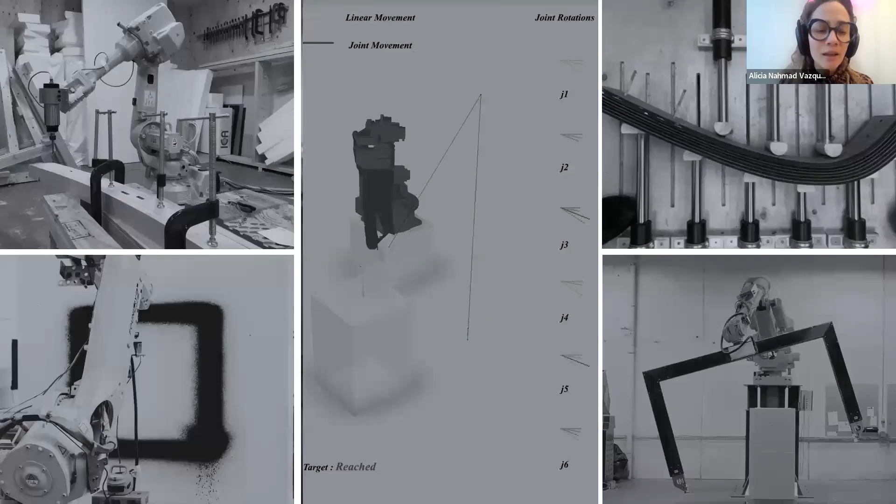I started working with robotics maybe around 12 years ago. And we have done many different things with robots, and a lot of different processes, as I'm sure a lot of people in Sina's lab also do a lot of very cool and different things with robots. So a big synergy there. We also design our own machines. Sometimes we build our own tools, like a pneumatic actuator. If the robot cannot do what we want, we design our own machines to do what we want.

And something that is very important is, of course, to think, if we are going to build with new technologies, how the buildings and the things that we build can look according to the new technologies that we have. That is very clear in the car industry, where we can see a big advance from how cars used to look before to how they look now that they are built with new technologies and advanced design systems and architectural geometry.

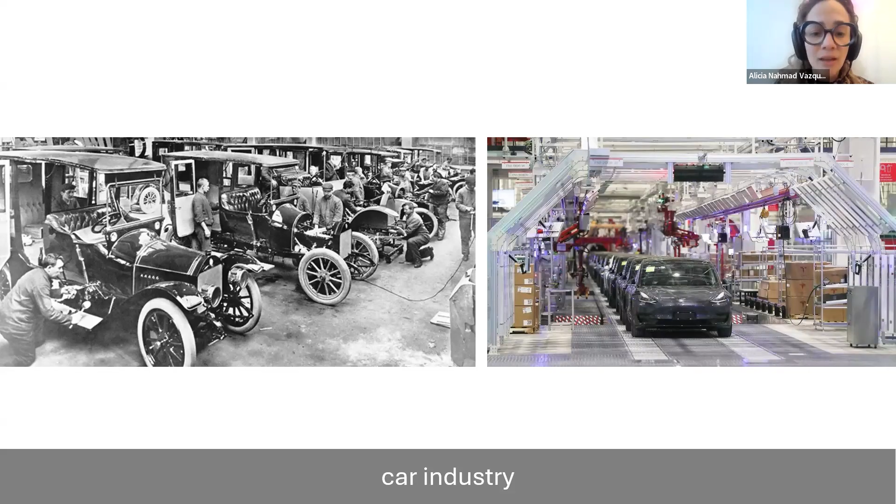However, and I think we all know this from the built environment, somehow our search for efficiency and for being faster and cheaper tends to go backwards. We see buildings from the past and we are amazed and really impressed by how they look, whereas our current buildings, and at least in Canada there is really an explosion of building right now, are they exciting us and are they bringing that sense of inspiration and awe that we used to have in the past?

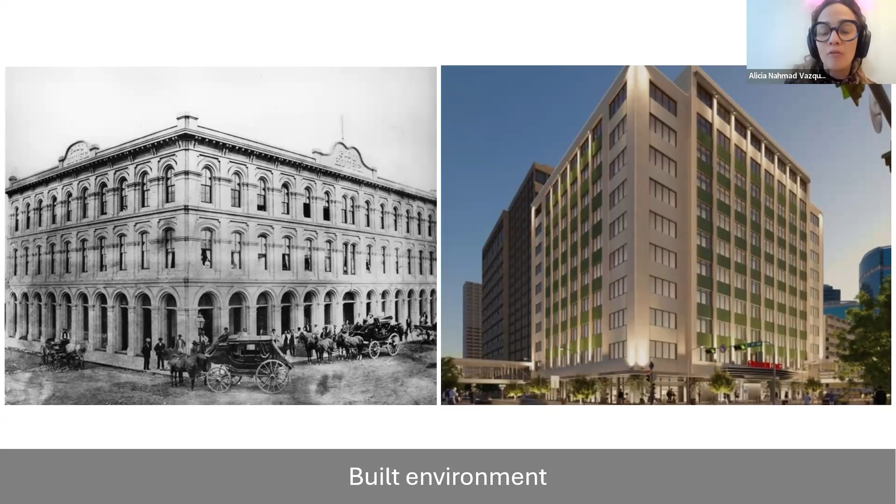And that is a critical point of where we are now. Something that is very interesting is also when we look at construction systems, like rebars or reinforced concrete, we see that these are patents that have been existing since 1866, the 1900s, and we still build in the same way. We still use all of these systems.

So how can we really make our work and our research with robotics and with new building techniques mean something, and why is the industry not moving in these directions? Maybe we hear a lot more now about timber and CLT, but if we look at the patent of CLT, it's also from 1920, so it's more than 106 years old by now. So it's also not the super new construction method that we are imagining. So how can we bring these tools to actually build in ways that are different?

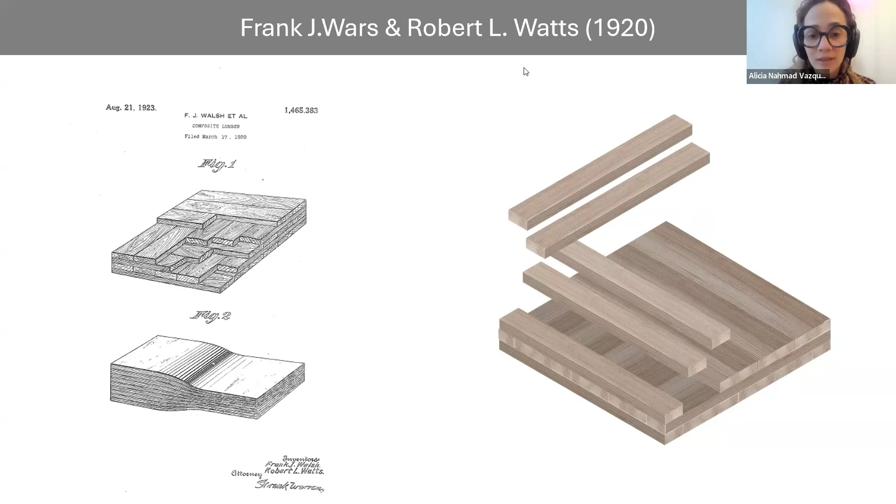Oops, sorry. And it's kind of interesting because in a lot of the presentations that I see, AI can give us really good ideas, and you see all of these presentations also from developers, and they end up with we can do all of these, and then at the end there is an AI image, right, which looks totally different to what they have shown you for the last 20 slides. Now we know that it can give us really good ideas, and it's a really fascinating era that we are in today, where a lot of people are starting to imagine really different futures and different realities for the built environment.

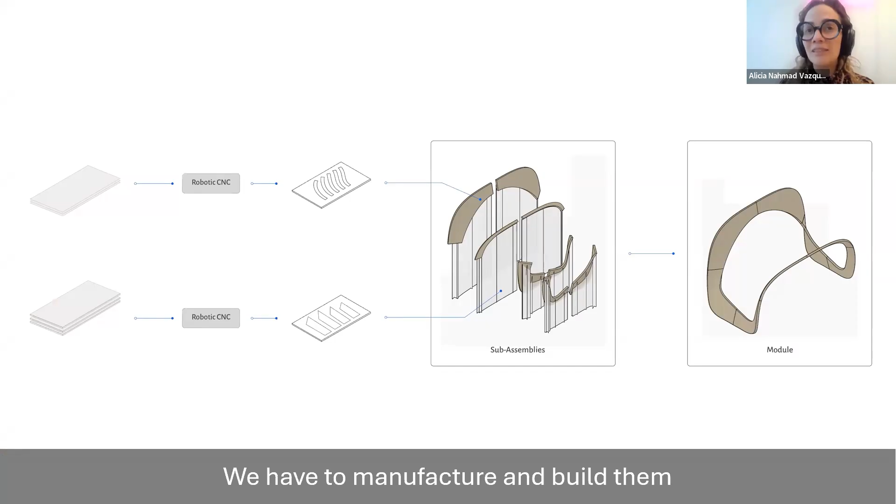And for me, it's always exciting when someone even shows us an image and I'm like, okay, more people are starting to think that we can build differently. But what we can actually do is, how do we build them? It's still very important to think, okay, we have all of these ideas. How can we manufacture them? How can we build them? And that's where our work has been situated for the last years: how do we build these things?

Of course, and thankfully, and this is not something super old but more recent, technology has really become more accessible. We can have access to a lot more, not only robotics, also a lot more computer vision tools, a lot more algorithms, a lot more machine learning right now, a lot of computing power. A lot of this is becoming so much more accessible that it is such an exciting era for where we are right now as architects.

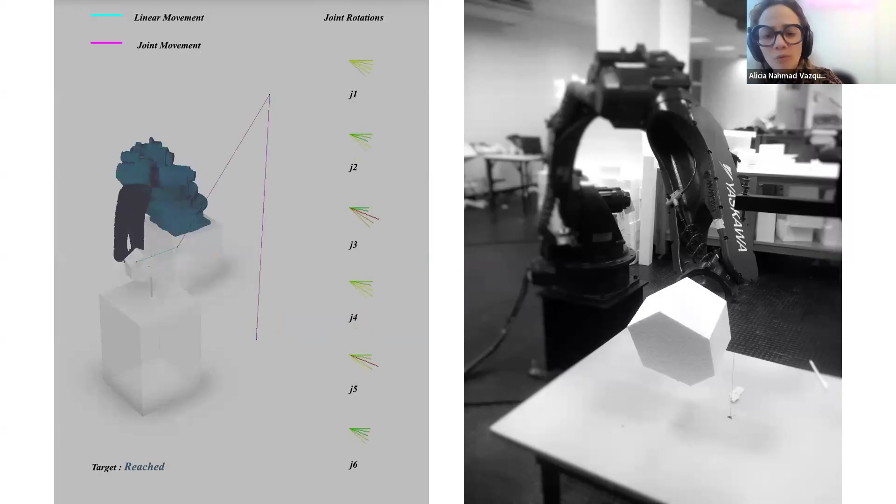And we also know that if we want to build differently, if we want to look at new construction realities, a lot of that is inspired by the past, right? So we have to look at old rules of building, ancient geometry, form finding, thin shells. All of these give us an idea of how we can now use techniques that became discontinued because they were too expensive, too difficult, or because the master builders disappeared. We can now redo them using robotics and digital fabrication. So a lot of this is coming from the past, to now learn how we can reinterpret some of these rules and build in a different way.

So we kind of have all the ingredients there. We have the rules from the past, architectural geometry as a field that has advanced so much. We have technology. So it's really about us as architects: how do we use them, how do we build, and how can we imagine other possibilities? How can we use all the advanced technological developments that we have for new build realities and for a built environment that excites us?

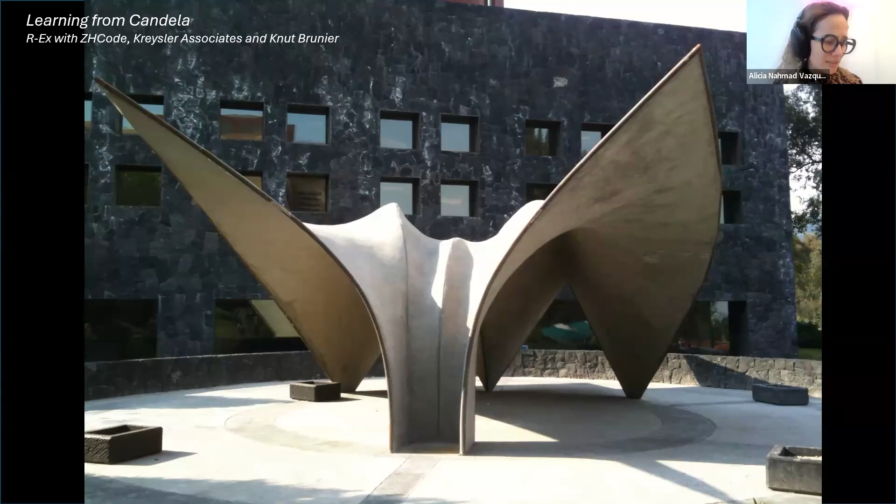So some of the first projects that we started doing was like this shell learning from Candela, which we built quite a few years ago now in Mexico. We only had a CNC at the time, we didn't have robotics or anything like that. We designed this shell. All of the arches are single curve, only one is double curve.

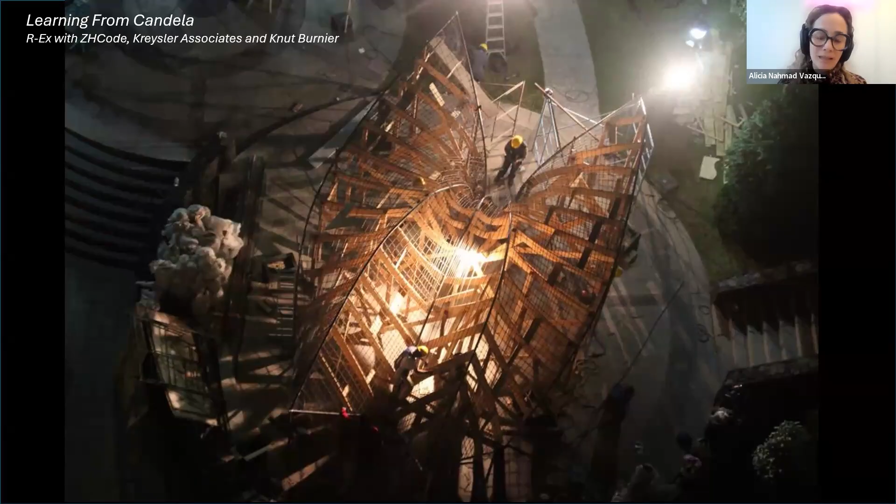Everything was done with craftsmen at the time, like masons, right? They were bending the beams on the edges. And the formwork was all done just with a CNC machine that we had on site, and we did this really sparse formwork, and then on top of that, the concrete builders rendered the concrete 6 centimeters thick on both sides of the shell, and then you can see the rebar.

Something very fascinating was to see the rebar distribution, how it really starts to match the design and the topology that we had in the poly modeling software, right? So it was really seeing how we model also can represent how we build. Then we also explored topology optimization. How can we reduce as much material as possible from a shell and still make it efficient?

So a few years later, we built this shell in collaboration with Kreysler Associates and ZHCode and Odico. We first designed the shell, removed as much material, and then built the formwork. In this case it was a bit more complex formwork, but still just using a CNC machine. And a lot of the workers would tell us, you know what, we don't really need any more than just a guide. We don't really need you to tell us how the shape is.

So it started to become really interesting for me to understand how we can merge these very skilled craft people with technology, because they only needed the formwork as a guideline, as a reference. Based on that, they could build this shell, which was rather complex, still standing more than 13 years later in Mexico City after quite a few earthquakes. So a really nice proof of concept.

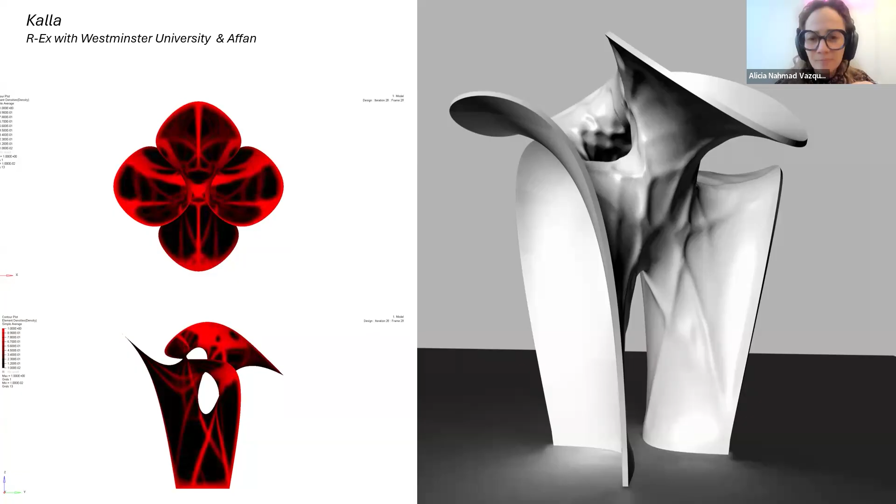Then we also explored more of topology optimization. How can we build this using different materials? So this is another shell that we built with Affan, a fiberglass manufacturer in Dubai, for the Seoul exhibition, trying to see how we can use digital fabrication and robotics to make the molds, to make it more efficient, to build shapes that maybe are slightly more complex.

And after this, in 2018, I was invited to collaborate with the Block Research Group and Zaha Hadid Architects Code to build Knit Candela, which was a very innovative shell in Mexico City, based on all the previous experience that we had of building shells. This was a really interesting experience into how we can bring the really advanced technology being developed at the time by the Block Research Group, a knitted formwork, which basically was going to be a stay-in-place.

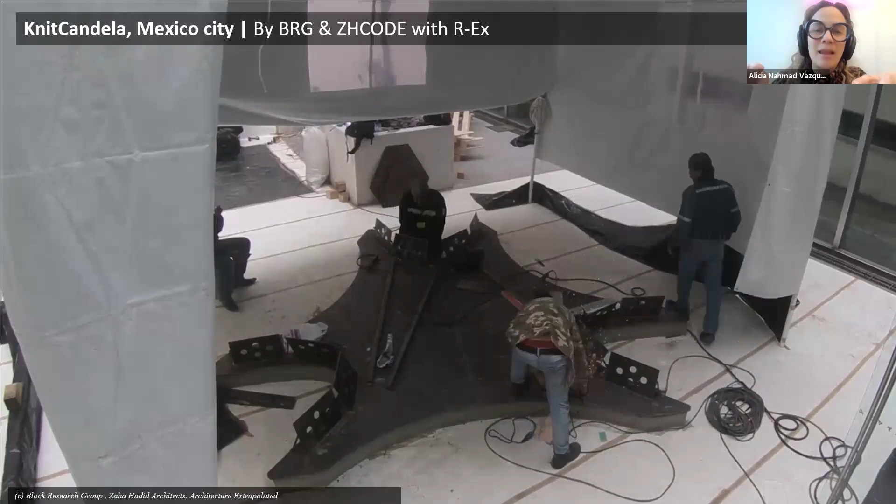So it was different from our previous formwork exercises, where we were already capable of reducing the formwork quite a bit, but we still had it there, into a stay-in-place knit. In this case, we had to work with a hierarchical utilization of technologies, where we knew that the knit required a very precise localization of the stretching points, just to make sure that it form-finds the correct shape.

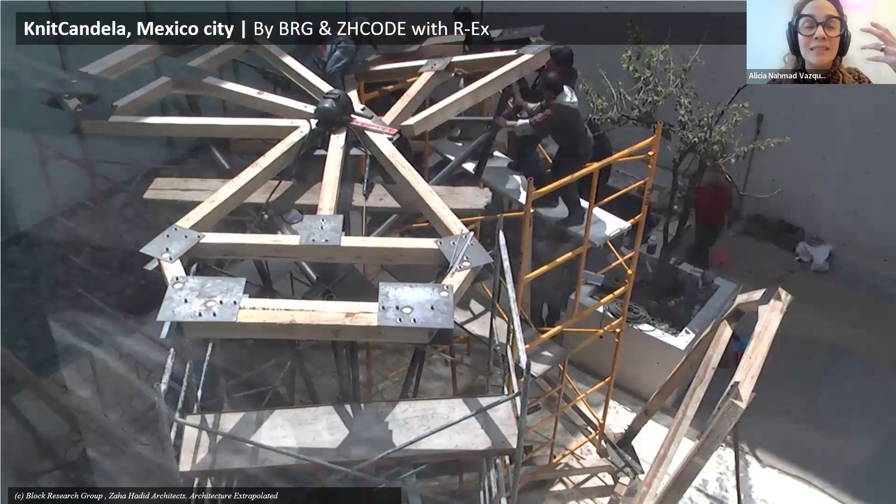But we didn't have access to really sophisticated machines. At this stage, we still only had the same CNC that we have had every time we go to Mexico.

So we really had to work through a lot of different iterations into how we can decide which parts of the geometry are done with the CNC to be super precise, and that will dictate and lead how the fabric gets extended, and which parts of the geometry we could have a little bit more tolerance for the workers to do manually.

So it was really a lot of discussions into not only the precision for the hierarchy, because we know that not everything needs to be done by robots or by digital, but how can we merge these two worlds together of digital fabrication and traditional construction.

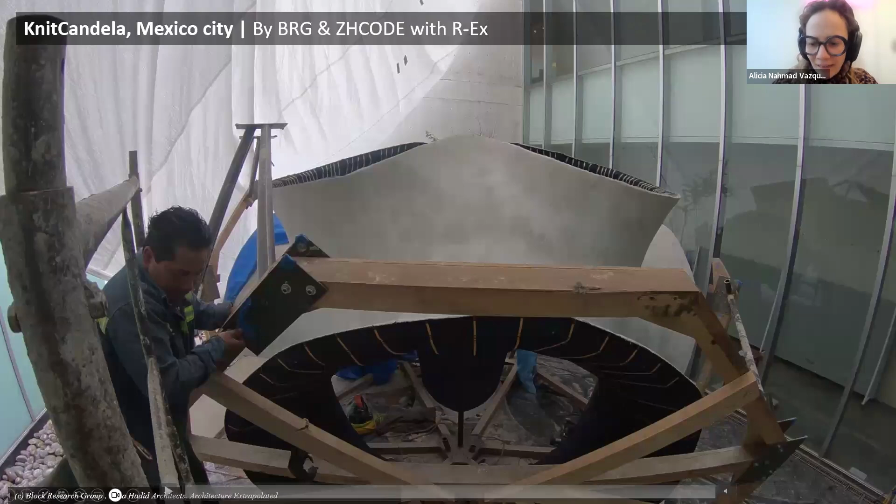And finally, we build the scaffolding. We build all of that big scaffolding that you can see out of timber 4x4s with laser CNC lumber inside to really mark the correct spots where all the hook rings will come, to then finally, when the fabric came from Switzerland, it got just assembled in place and stretched, right?

And we didn't really scan it to make 100% sure that it was the correct geometry, but it stood there for a long time. It didn't look terribly wrong. So it was a really exciting step for us after working through many different shells, when we really needed these high degrees of precision to understand how we can mediate between these. And at the end, the shell was rendered in concrete by the same workers that have already been working with me on all of the previous shells.

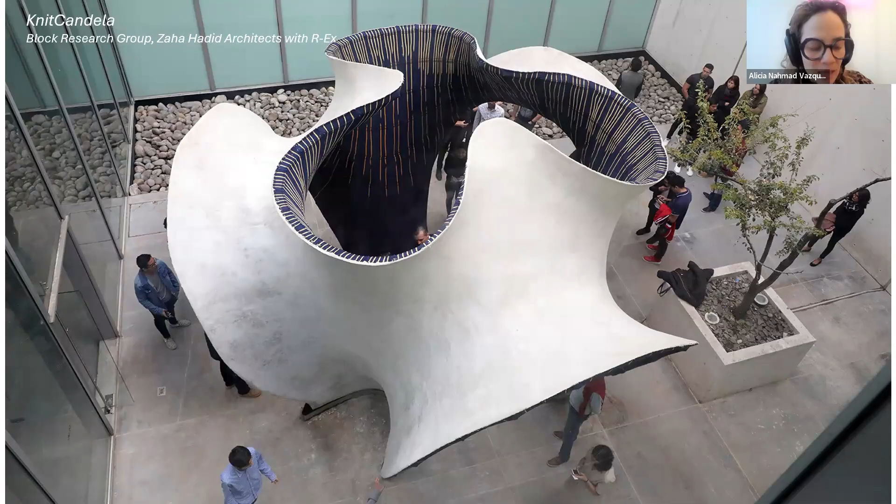And something really exciting happened when I called the workers to build Knit Candela. This was the third shell we were doing, right? And a lot of them were telling me that since they started doing the shells, they show this to any other contractor they go to work with, like, hey, I have built this, and that it can enable them to get other jobs, but also to see that pride in their job, right?

To create that pride in the workers of what they are doing is something that really makes us think, well, construction is a vertical, right? We need to integrate with the trades, with the designers, with contractors, with developers, with architects. So seeing that the fact that we are doing different geometries is benefiting everyone, and it's making them really excited, and everyone got paid all the time, overtime.

Everyone that worked overtime got paid, and the workers were working overtime, and they were really excited, telling us this is one of the most exciting projects they have worked on for a very long time. So it was a really fascinating experience.

And of course, it makes us think, how can we change how we design and how we build, and how can we incorporate architectural geometry and fabrication machines, and also enhance stakeholder participation, not only developers, designers, clients, architects, fabricators, but also the masons, the workers, everyone on the vertical of construction, enhance their participation through technology and through different ways of building.

And we have been looking a lot at robotics as that flexible machine that enables us to do hot wire cutting, 3D printing, milling, sand cutting, all kinds of different processes, right? So we know that we have a really small, compact, affordable, and powerful machine.

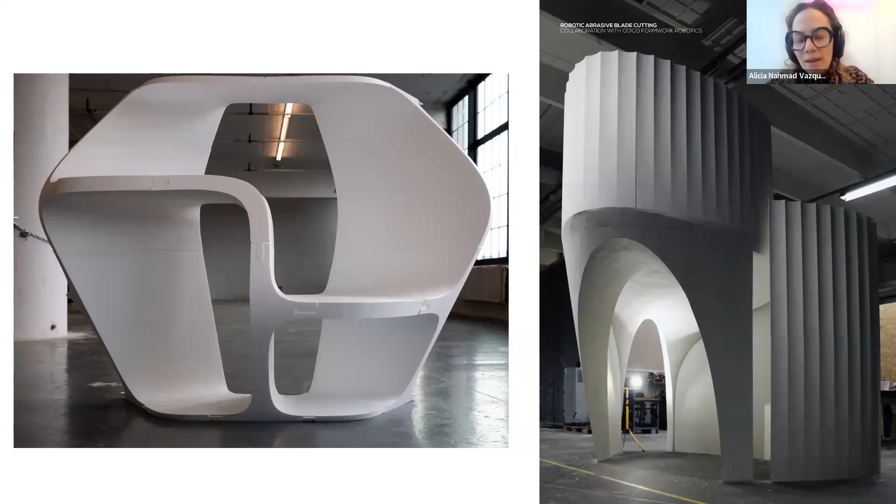And this is a project we developed at the AA, at the DRL, in collaboration with Odico, trying to look at how we can make these formworks. This was a mock-up for a one-bedroom flat with one of our teams at the DRL. How can we also use robotics to create patterning, to create spaces where maybe the ornamentation is part of the design, but also how can it mix with traditional ways of building? So not everything was robotically fabricated, but we have a very traditional stick frame construction that merges with these new ways of building.

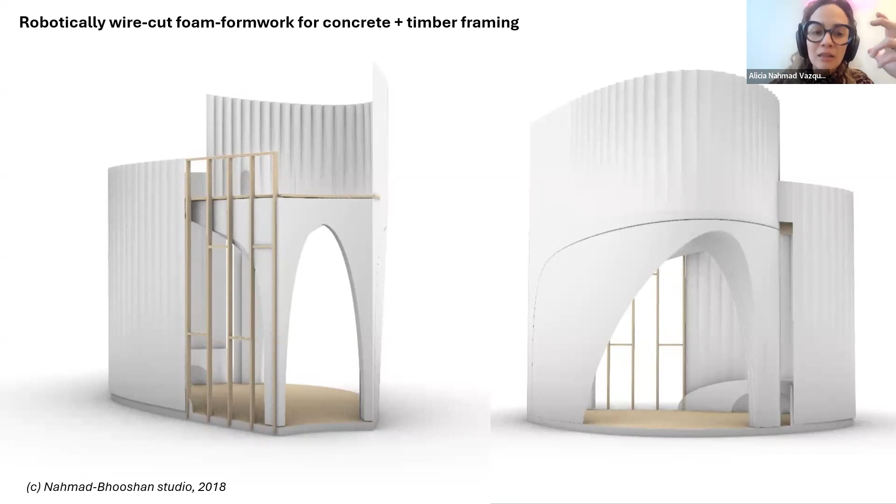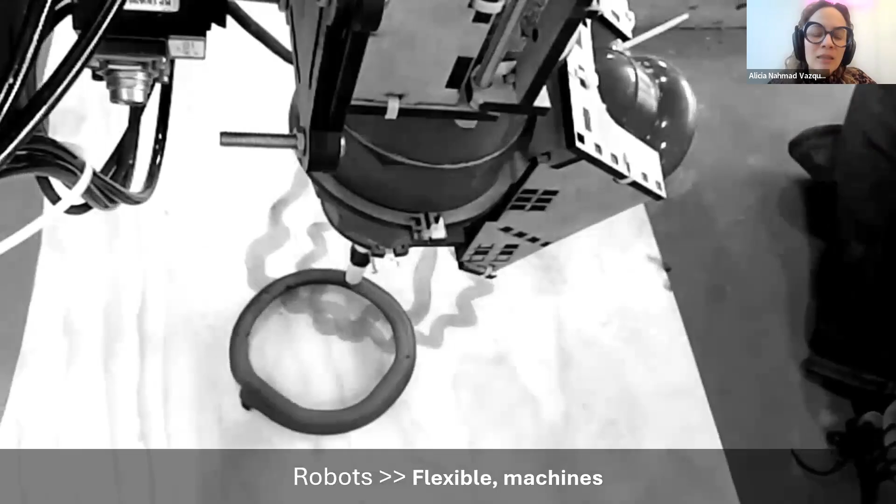And this was something that we proposed to the building minister in the UK, and they were really excited by the fact that we are merging these two worlds together, right? And this was some of the early experiments at the DRL into clay printing, developing our own extruders in collaboration with the Build Space at Autodesk. But the more important thing was not only 3D printing, but also what are the new built realities that this can bring to us, and the new spaces that it makes possible.

So we were always kind of trying to work in between these two worlds. And if we have a wall that is 3D printed, can it also enable infrastructure, like installations? How can it be different from just a normal wall that is normally a stick frame construction, right? With a wall, how can we really take advantage of all of these technologies towards new topologies and new tectonics that maybe were not possible before?

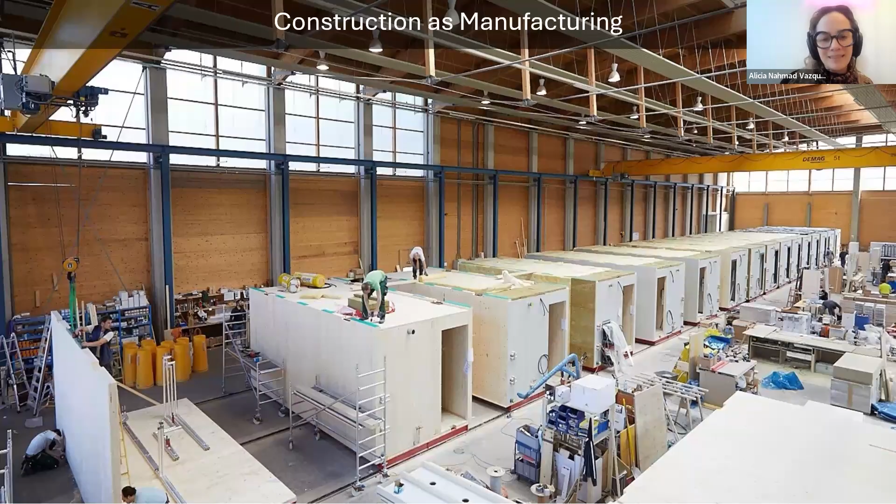And so we know that robotics and machines in architecture, or in construction, is not something new. We have had DFMA since the 1980s, design for manufacturing and assembly, but we do know that factory-made buildings have a lot of problems that we don't really see in buildings that are built on site. Although they are faster, efficient, and sometimes maybe cheaper, they rely on pretty much centralized supply chains. They require transport, and they don't always adapt to local economies because they don't need to, right? They are made in a factory offsite, really far away.

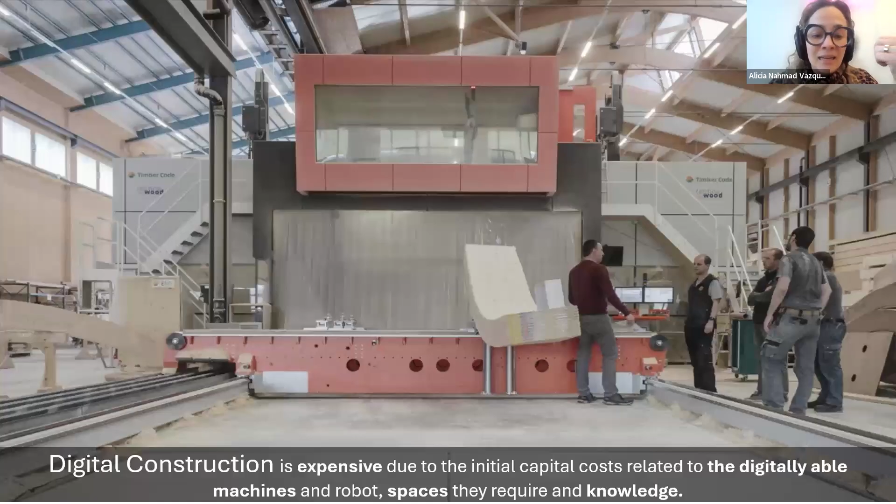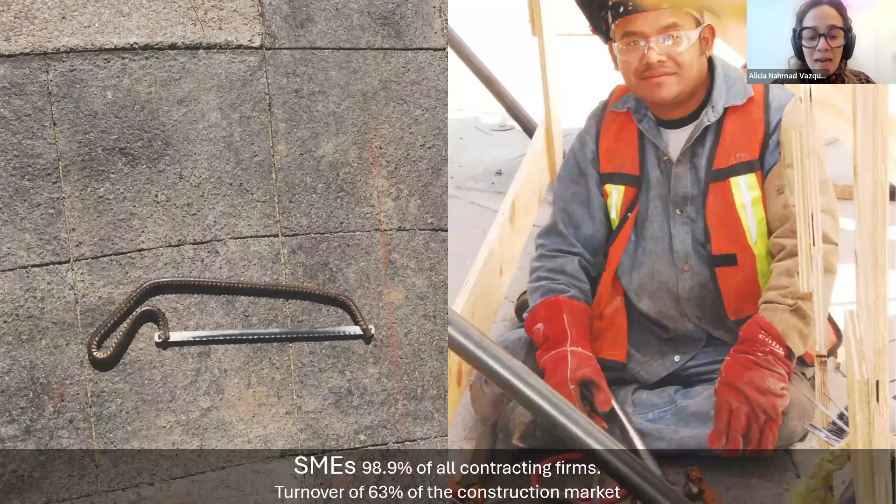So they don't connect a lot with local economies. They don't benefit the local economy, but also not with local idiosyncrasies, local ideas of what people like. It also tends to be expensive just because of the capital cost related to the machines, to the robots, to the knowledge. And so it lacks ornamentation. And we know that robotics can give us all of this ornamentation almost for free. We don't really need to put in any extras, but we are missing that integration with the local ways of thinking, local crafts, local skills, local supply chains. And in the world that we live in, small and medium companies are like 98% of the contracting firms, and also of developers.

We also see a lot more small and medium developers that are doing infill housing, small duplexes, quadruplexes, like 4 or 5 story buildings as a response to the housing crisis that we have around the world. We see that it's not only about the big developers that could maybe afford this, but it's more about small and medium companies that need new ways of thinking, new machinic ways, and new ways of building.

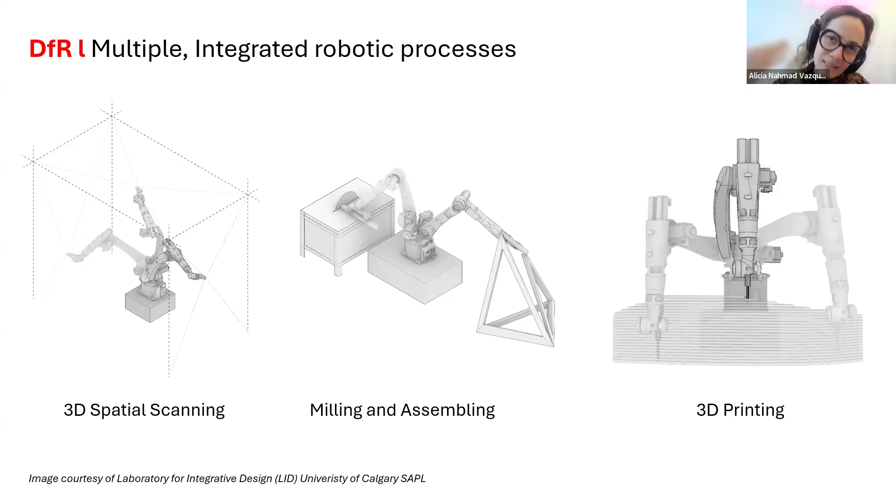So something that we have been thinking is, how can we move from this DFMA from the 80s into a paradigm of design for robofacturing, of using robotic cells that can robofacture high quality products and can be not exactly on site but near site, can integrate with local supply chains, local crafts, local economies, and this is where we have been working when we refer to small. And what we like about robotics is, of course, that we can do scanning, milling, assembling, 3D printing. So we have single machines, multiple processes. There are maybe some trade-offs in accuracies and efficiencies, but we do have a very, very simple way of doing it.

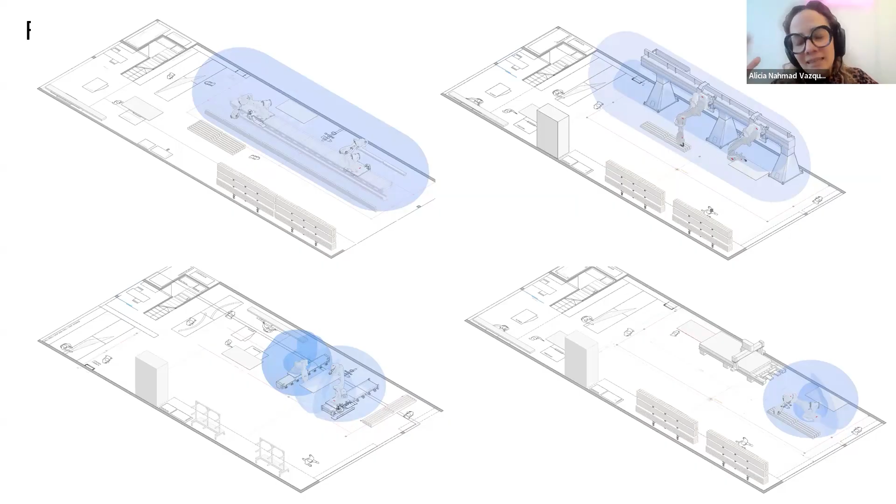When we talk about flexible robot cells, we don't talk exactly about a container. We're talking about maybe a 250 square meter facility, what we have been developing, where robots can have different configurations based on different production lines that are required by our different clients, and also by the different products that they are looking to produce. As I mentioned before, it's not only about the robots, it's about other machines, woodworking machines, metalworking machines, storage spaces. There's quite a lot more to that. And of course, really benefiting the local economy, not only by incorporating the on-site trades, but by buying local materials and using local supply chains. So that's the work we have been doing, this DFMA to DFR.

And that's the work I have been developing more closely, especially over the last 5 years, into architectural geometry and trying to democratize the digitization of the construction industry to a larger public, right? To be able to engage more people. And we have also been working on developing these participatory frameworks to engage more stakeholders. So as part of design for robofacturing, we are working on machine information, on developing cyber physical platforms, and that's part of the work we are doing here at the Laboratory for Integrative Design, into how we can keep these limited resources but introduce new vocabularies in this context of design for small robot cells for robofacturing. So one of the biggest changes is architects as system designers, a system designer that controls the process and controls the technology.

So this is a retrofit for a facade of a building that we were working on. In this case, the building already exists, and we kind of designed this. It's all catenary curves that are bent glulams with different apertures depending on the sun exposure, but

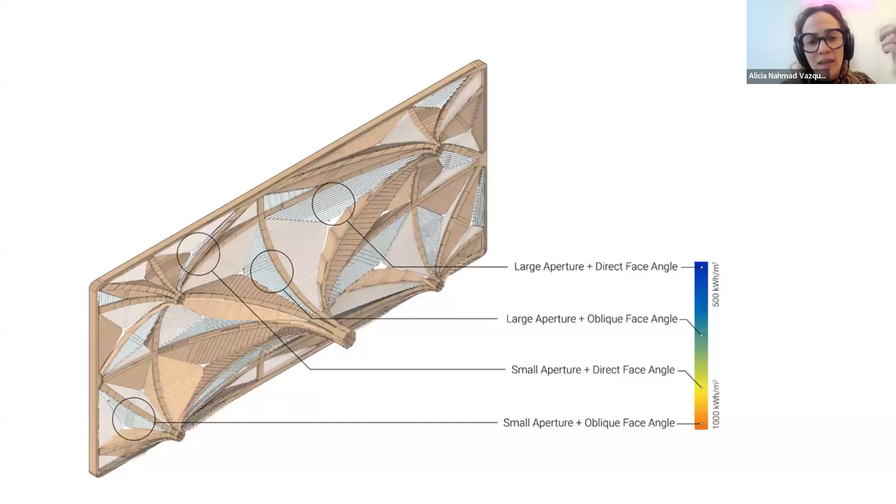not only from the outside, also from the inside: the view that the people want to have, the street view that they have, their relationship to the outside buildings, and the solar gains and energy gains. So in this case, we did all the studies, like you can see, from exterior solar gains, but also from the interior, different views and different transparency levels that the facade could have.

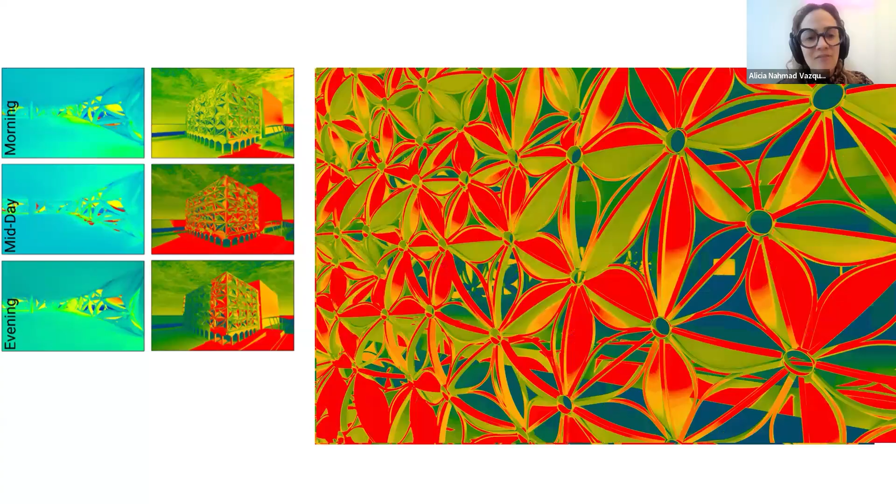And then there's the participatory framework, where we can have the people that are living or occupying the building, the occupants, being able to decide, in this case using a gaming engine, how they want this facade to be, more out, more in, but at the same time giving them feedback like, well, you have better views, but less sun exposure, or more radiation, or you are going to have more energy consumption.

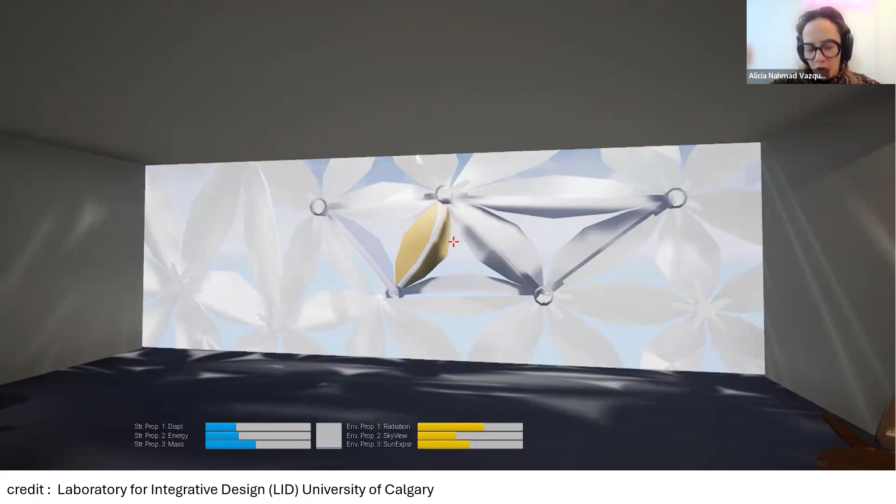So they could pick between transparent and opaque panels, and they could pick between pushing the facade further out or more in. And the idea is also that the final user, the same way that when you buy food at the supermarket and you can see the nutritional ingredients, right? You could also get an idea of, well, if I do these design changes, how is the energy consumption

changing? And we eventually want to integrate this to fabrication, so that we can say also, well, this will require more material, right? So that we can have a really clean, clear and transparent bill of materials and understanding of how these small decisions affect the whole downstream production cycle, not only the use and the occupancy, but maybe little changes on the geometry will require a lot more wood, right?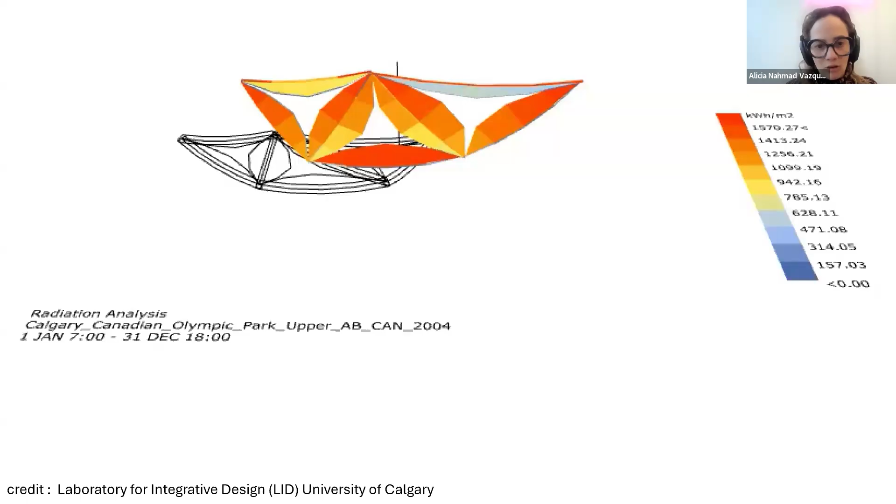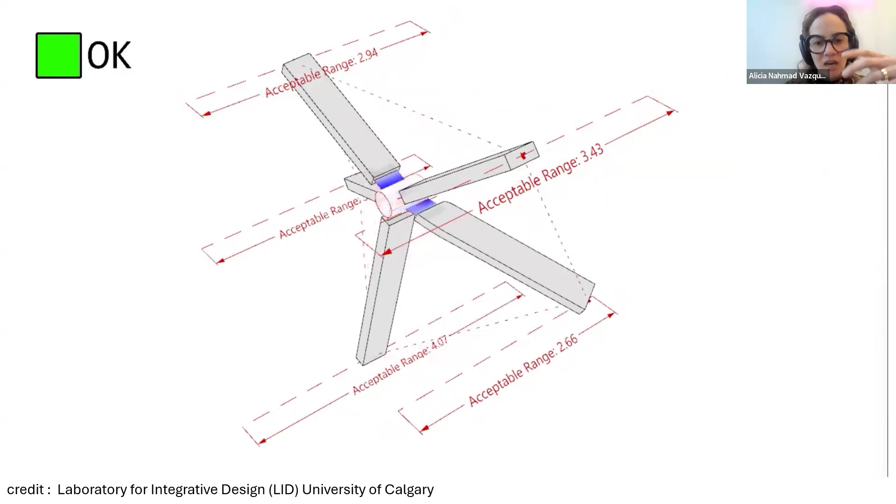Of course, on the back end of the platform, there is all the solar analysis of all these different configurations, and also on the back end it was constraining: okay, what is the acceptable range? How much can this move? When the geometry starts to be invalid for the robotic, for the catenary curves, for the bending of the glulam, all of this was calculated on the back end, not available to the user to see. But a lot of the smartness of the platform was at the back, right?

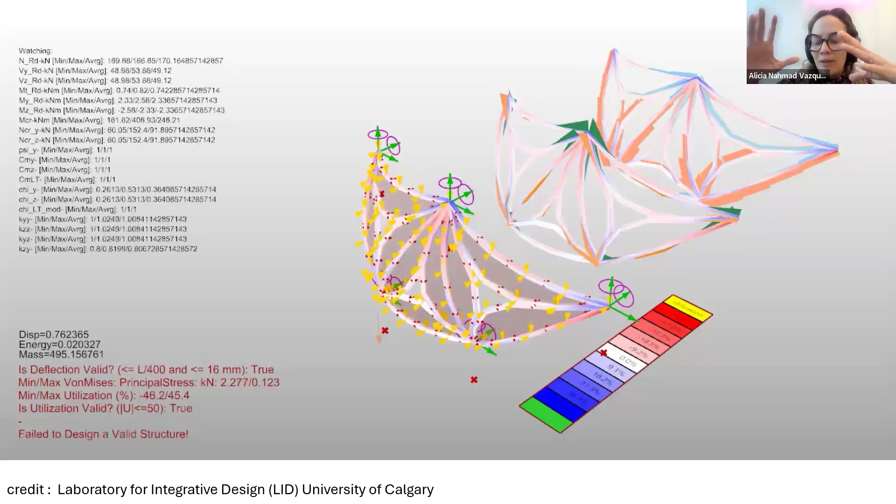And this was developed at the lab by one of my PhD students, Arman. And this was all of the structural analysis also, of how the different configurations that the user is picking, whether they are working or not, when they start to be one next to the other, right? It's not a single node, but multiple nodes.

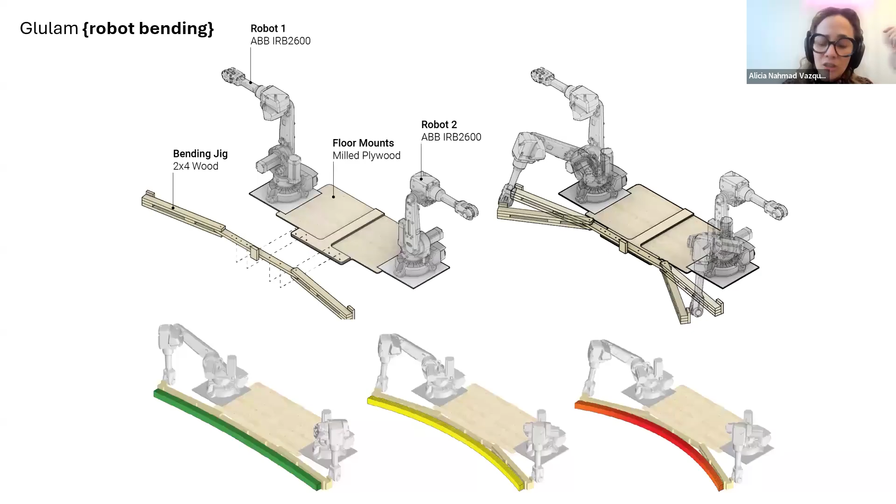In this case, the project was a collaboration with DIALOG Architects and also a local facade fabricator that was very engaged in making this facade with us. We did prototype quite a bit of these nodes. All of these are catenary curves, so the glulam laminations could just be glued together, then bent, and then, using the same robotic setup after bending, do all of the slot milling, all of the holes, all of the drilling for it to be assembled on site.

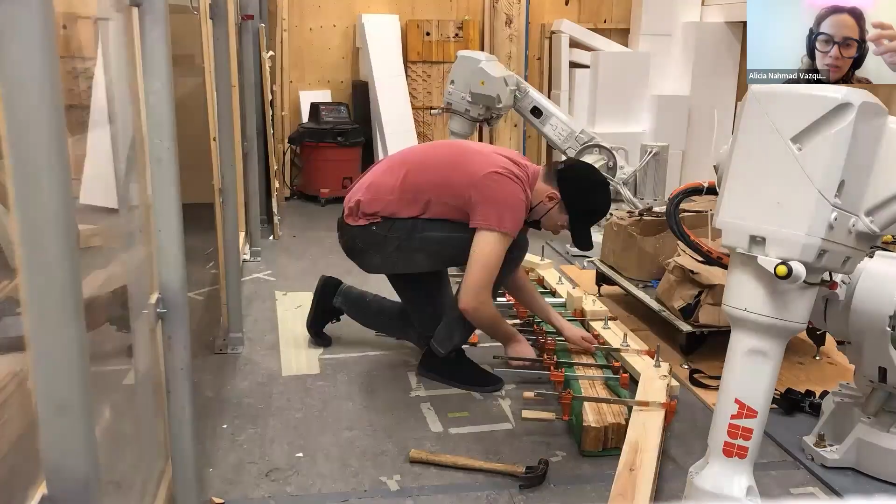So this geometry and fabrication feedback was put back into the platform to know which of these geometries are feasible and which ones are not. So integrating all of that knowledge back into the user, not only from a geometrical view, but from a fabrication standpoint, and trying to make this as transparent as possible all the time, right?

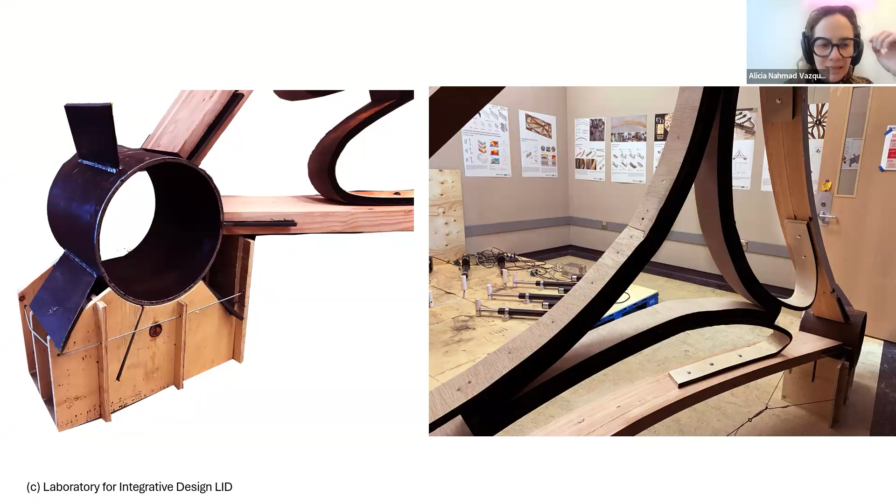So here we had the miters. We had all the slot milling, and then all the miter cuts on the ends with the circular blade, and also with the spindles. So again, same machine, multiple different processes. And well, this was the prototype. These are the steel nodes that were done by our facade partners, and then some of the prototypes of the facade that were finally fabricated.

But the more interesting thing was all the participatory design framework that was developed with our students. Another part of our work is towards these heterogeneous material understandings. Now that we know we have digital tools, we have computer vision, how can we look at material not only as timber or glulam, but how can we actually see what is inside that glulam, and how can we make it smarter and have more control over the material?

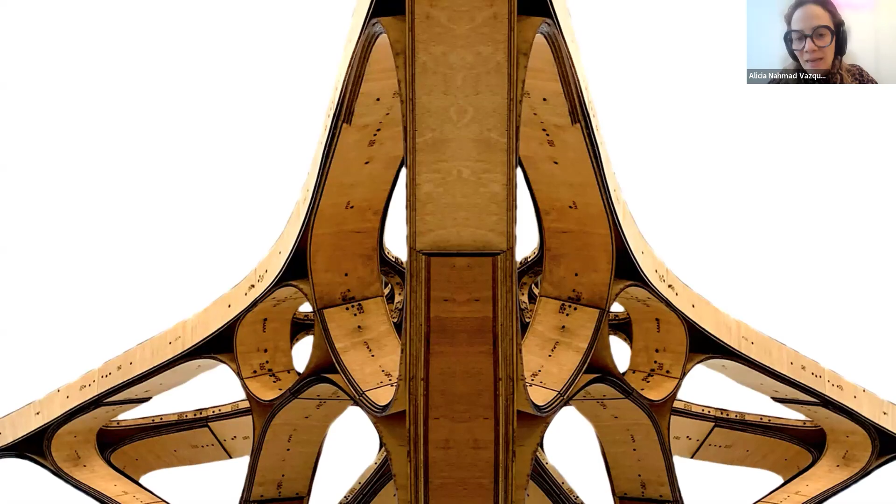So this is a project that we built here at the University of Calgary, also in collaboration with ZHA Code, looking at different glulam, bent glulam expression, right? In this case, the idea was that on the bottom there is a thicker lamination, right? You have maybe 8 to 12 lams. As you go up, you start to reduce 6, 5, 6, 4, 2, and then at the end you have only a single lamination, right? So making this glulam very expressive in the structure, and not only something that you kind of buy.

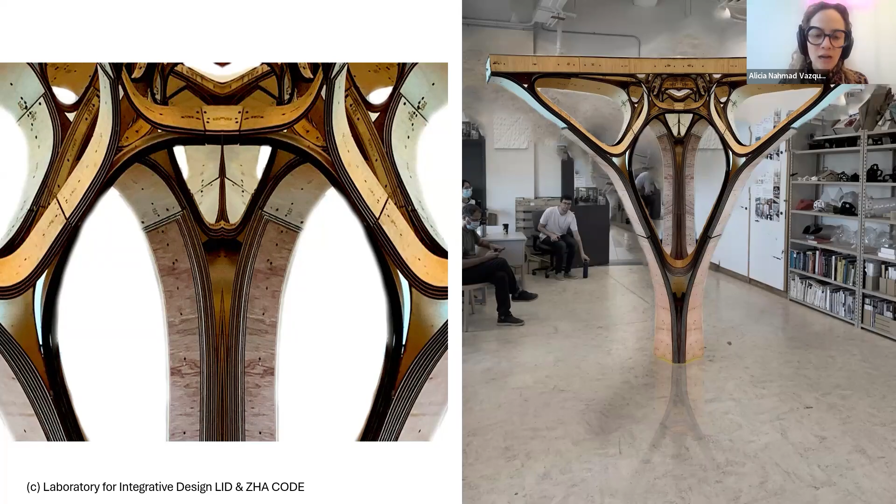In this case, we had to develop our own machine, which is all linear actuators that have a speed. So based on the speed, you can control how far they go. The speed and the distance give you control over the actuator. And then we had the different curves. In this case, these are not catenary curves. There is a lot of different curvature. So we had to work with our own machine and really try to explore that hierarchy from the bottom to the top on the bending, on the curvature and on the material affordances.

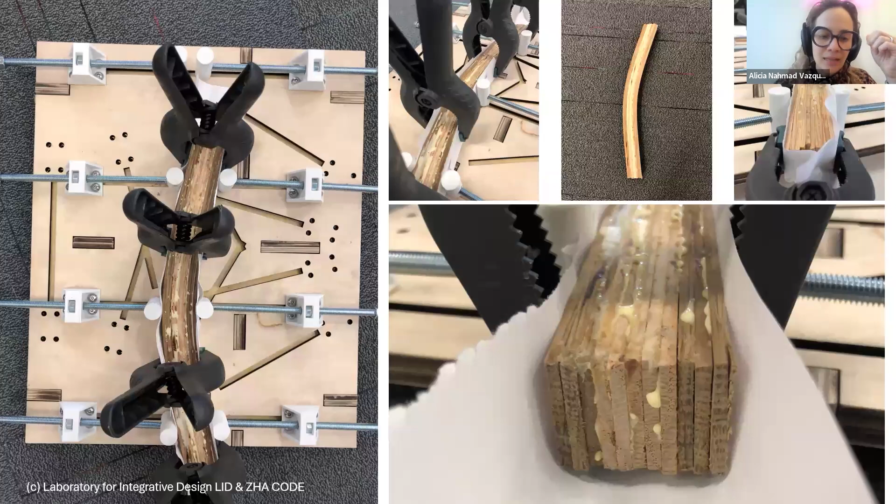And so we also started to explore at the same time what happens if we start to mix different woods. So for example, we have walnut or a harder wood on the outside, which will be more resistant to the weather and a lot stronger. But then on the inside, we have softer woods that will make the lamination at the end of the day lighter weight and not as heavy.

And this is something that we also explored a lot in my studio in the M.Arch at the Weitzman School of Design, these hybrid laminations. One of the teams did laminations with pine, Douglas fir, oak, changing the lamination, and asked what implications this eventually could have not only for the aesthetics but also for the performance. In this case, this is walnut, again with pine, and again with Douglas fir, trying to see how we can use the more expensive, harder woods where we need that resistance, and also our interior laminations.

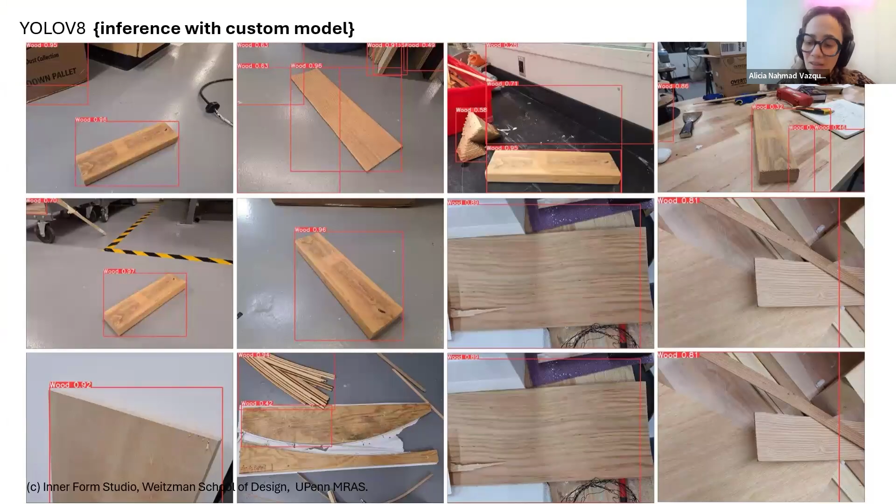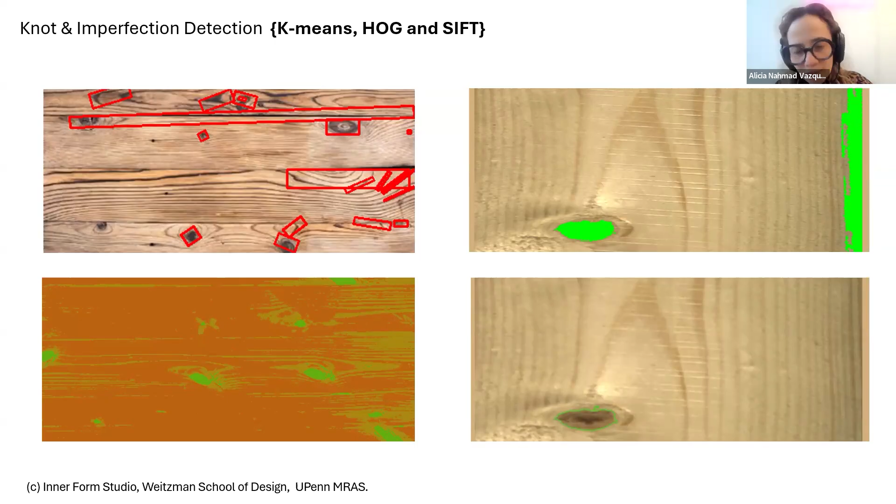And we are also looking at machine learning as a way of understanding materials, right? So not only identifying wood, but also what the wood imperfections are, where the knots are, what the direction of the grain is, and how this can help us have more efficient workflows towards milling or positioning our wood on the machine, so that we are not only using the wood most efficiently, but can also control the speed of the spindle, especially when milling curvature, as you go from across the grain to along the direction of the grain. How can you actually work with that? This is a lot of the research that we have been doing.

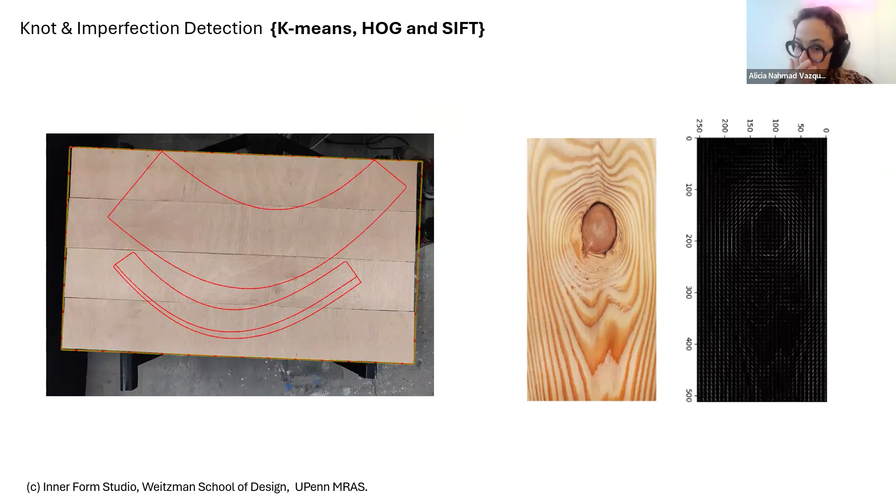However, it's very easy to move aluminum sheets around. They are flat. When they are folded, they use a lot of space. The volume is really high. So can we just bring the robot inside the container on site, score all of these, and then bend them in place and have the benches? So this is some of the furniture, just at a small scale, that we are doing with that

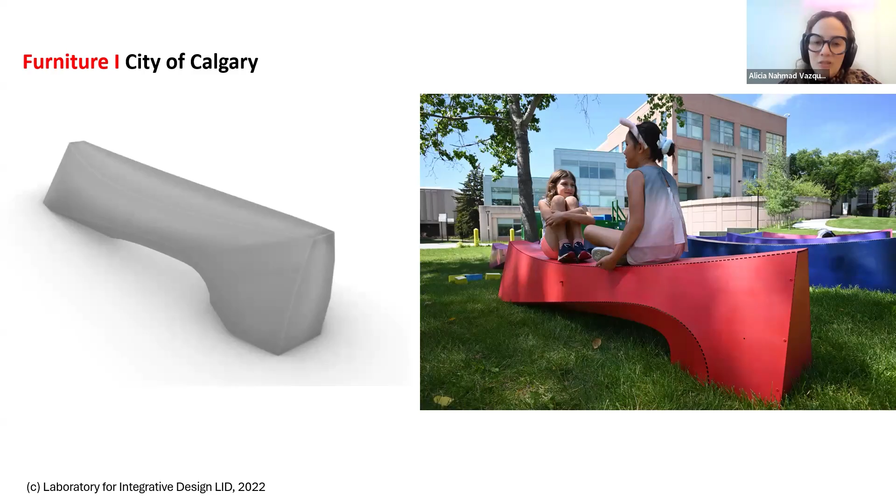So in this case, we had sand batteries inside, and we had a thermostat. So in the winter, when you sit on the bench, it will warm up and you will feel a bit warmer. And so this is some of the research that we are looking at, always trying to think what is exciting about these materials and these machines, and how can we make it different, or more efficient? Maybe not always just making it simpler, but also making use of the concrete in ways that could do more than just being a bench, right?

So we really use how we can leverage technology to create this sophisticated, dynamic, and customizable process. And more important, imagining a different way of building, a different way of relating to the trades, a different way of how our buildings look.

And this is a phrase I read a couple of years ago, but I really like it, from Francis Kéré: the more local materials you use, the better you can promote the local economy and build local knowledge, which makes people proud. And this is so true and so related to our experience, and it's really motivational to us. So maybe 5 years ago, we started the Circular Factory, which is a startup.

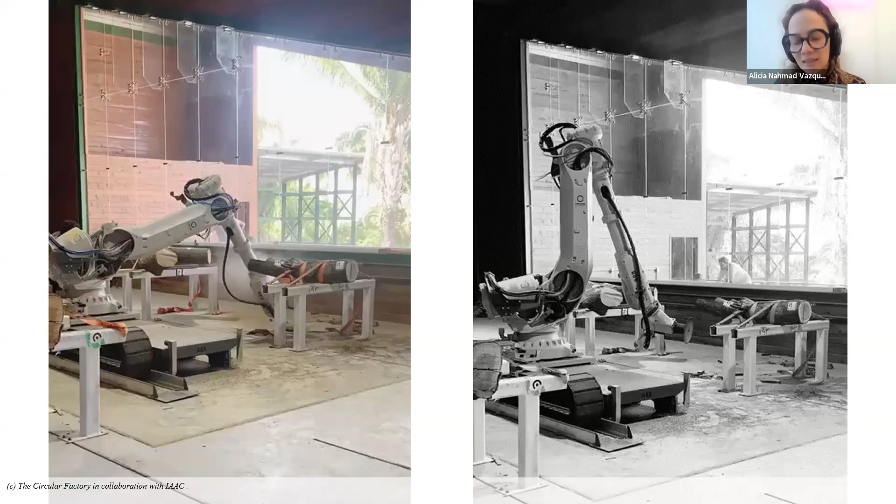It's a small micro factory, maybe 400 square meters with robots, and we have been exploring a lot of different ways of building. We have mainly been using local timber. This case was the most extreme. This is a project we did in collaboration with IAAC.

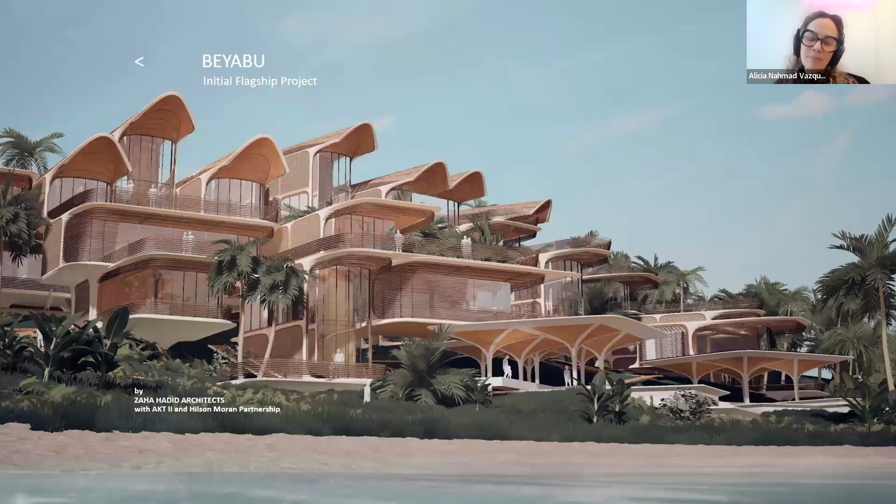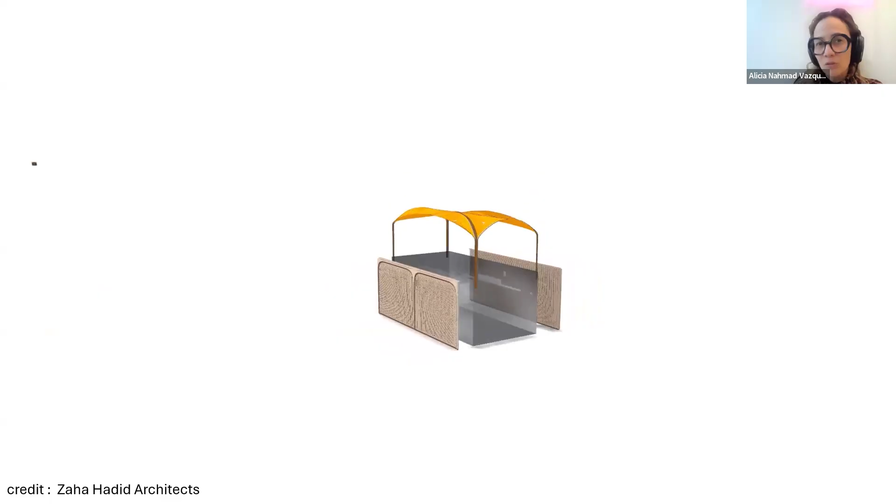And this is a collaboration again with ZHA Code, and they were going to build this project, and how can we build it with local resources and not import everything from abroad, right? The idea was the same as I mentioned before: how can we engage with the local material suppliers and the local economy? So with this idea, we started to design the microfactory. Of course, this being a Hadid project, it had all the complexities of a configurator. So it really had a lot.

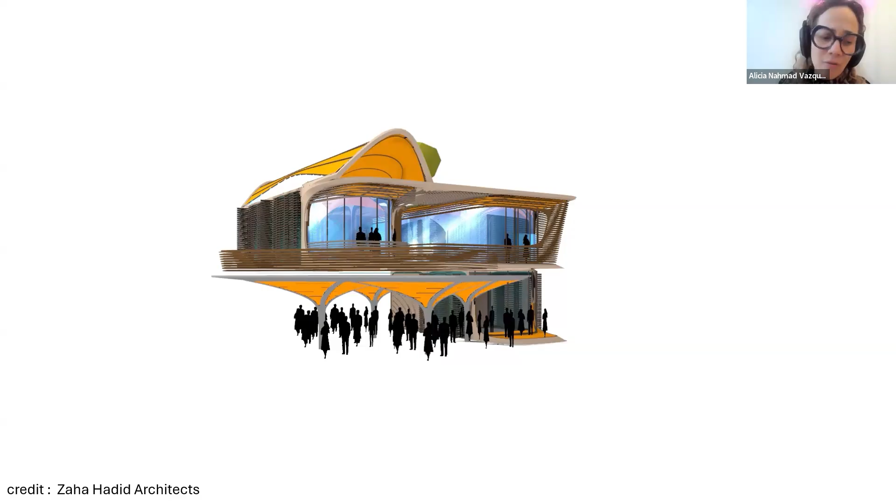It was giving the users a lot of different options, like they could pick their windows, balconies, and we had to design a factory or a production line that could have the flexibility, because we don't know what the users will pick, right? So the flexibility to produce all of these different components in an efficient way. This was a really exciting collaboration. All the configurator was done by ZHA, and they had this very large kit of parts.

And so some of the first steps we really had to think about is, how can we work with these certified forests, or really try to look at raw materials locally, what is locally available.

We were not sure what was locally available, and then try to create this local microfactory that could integrate all of our experience, the digital information, and the local knowledge of timber, which was not a lot, and also create these components and this kit of parts for these modules.

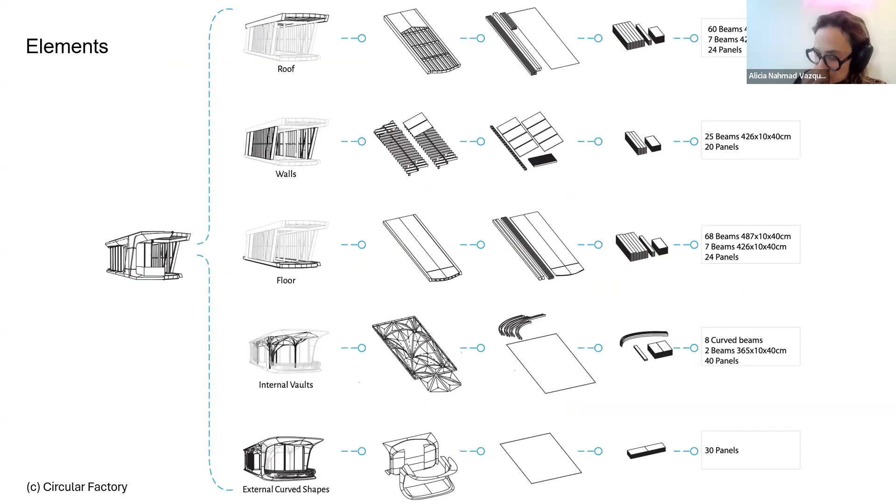So one of the first things we had to do was really a hierarchical analysis, again, like in Candela, a hierarchical analysis of the pieces, right? Like what requires more curvature, what are the more sophisticated parts that actually need digital fabrication, what are the parts that could be maybe done more traditionally, and how we can split these to really have an efficient factory. Of course, we designed all of those panels with their corresponding fabrication process, like planer, jointer, robotic CNC. As I mentioned, it's not only about robots; it's about the full production.

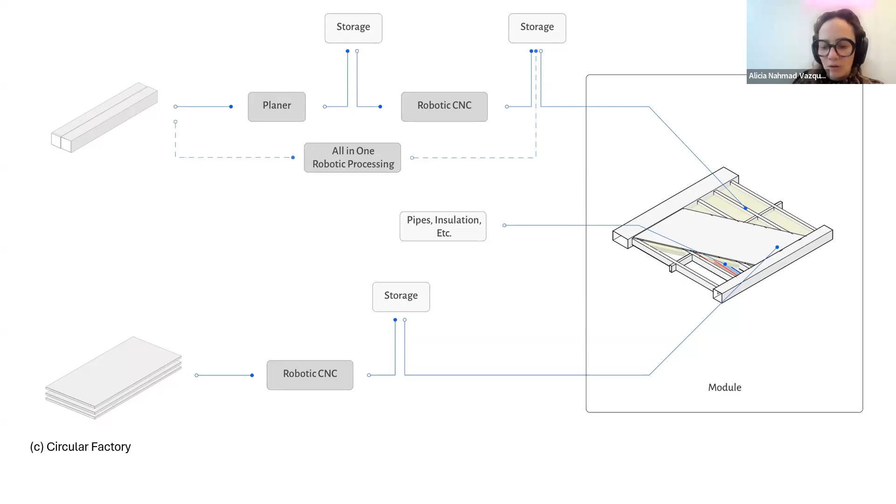And inside each panel, you had all the pipes, the insulation, everything that you really need in a construction project, right? And then we had all of those curved modules. What do they need? And how can we make them? They ended up being made with the robots, not in this way. So we worked on rationalizing and doing the DFMA for that complex design.

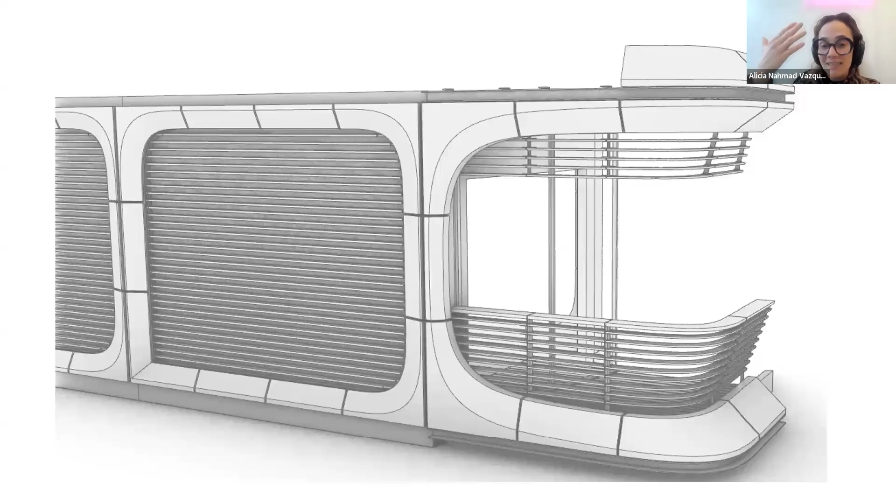Something also interesting that we had to take into consideration was the fact that there are no cranes. So, for example, we had to see, okay, what is the biggest machine that you have? Well, it's a telehandler. It can only carry 2 tons. So we have to make each component, regardless of what the robot can do, not heavier than what the machines can carry, right? So really trying to localize everything from production materials to the local machines and the local existing facilities. So you can see that all the panelization is made in small panels that can be carried.

We looked at the lamination, how different lamination techniques, really going back to that research of the grain directions, merging different lumbers, can give a different effect at the end, and actually a different aesthetics that we can control, so we can control the direction of our laminations.

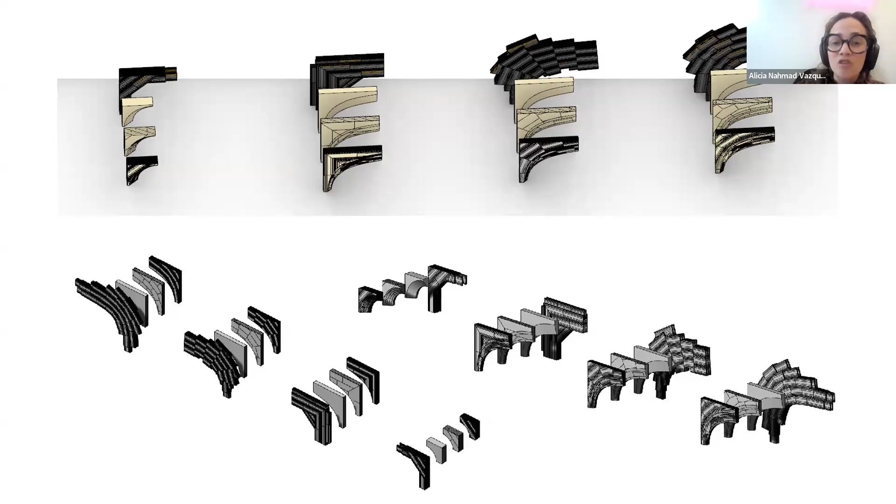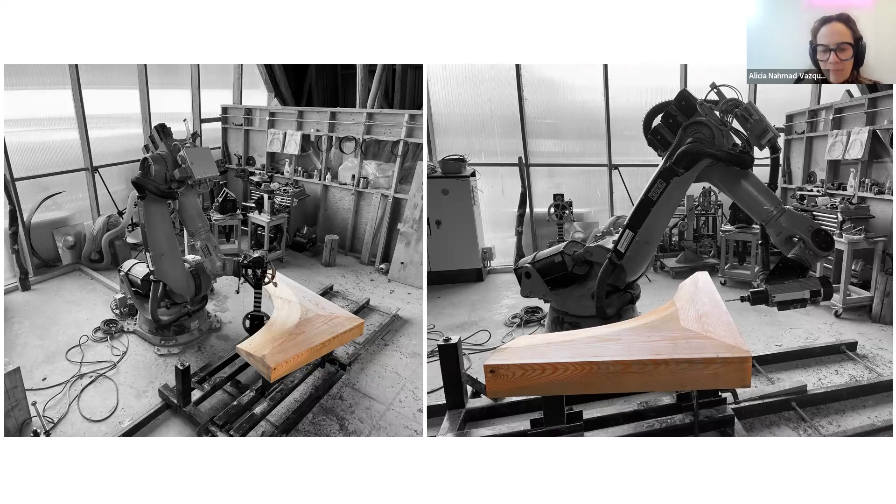And we built this first prototype at Hooke Park in Dorset, just testing some of the ideas. This is Hooke Park, right? The bandsawing, the milling, the prototype. Based on that, we thought, okay, this makes sense. We can really dive into this and start to do that microfactory adapted to the local means.

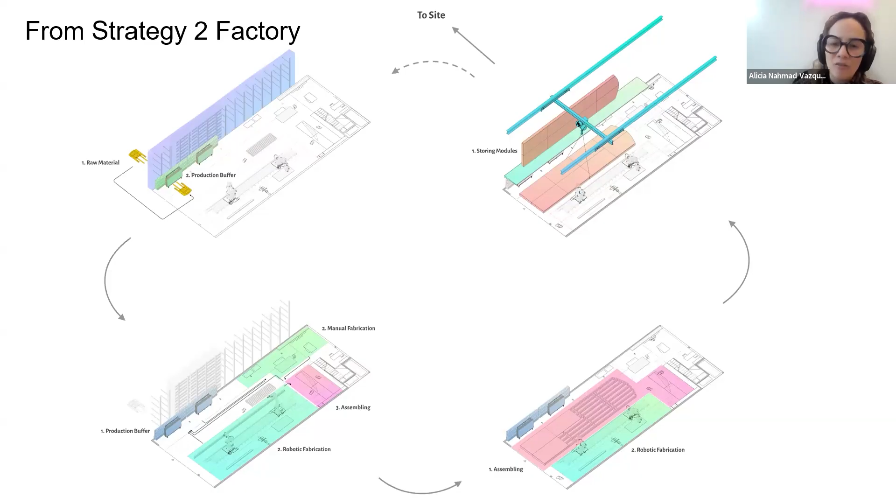So the design was really trying to keep the footprint as compact as possible, but having all the machines needed, all the storage, and all the different utilities. As you can see, material comes in, gets processed, you have a crane, you have storage, it's assembled, then it gets out, really trying to minimize the financial investment while maximizing the flexibility and the ability of making different things. We also have a lot of computer vision to understand how to adapt to local materials that might not be precise, might not be totally correct, right?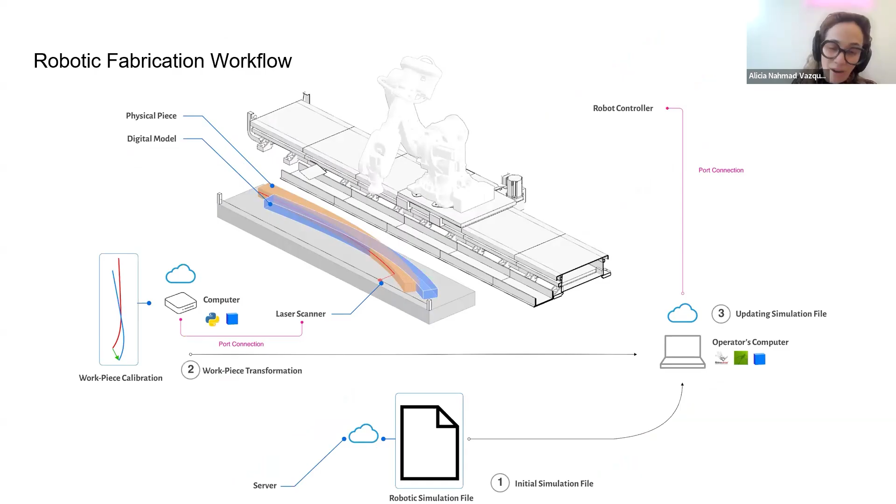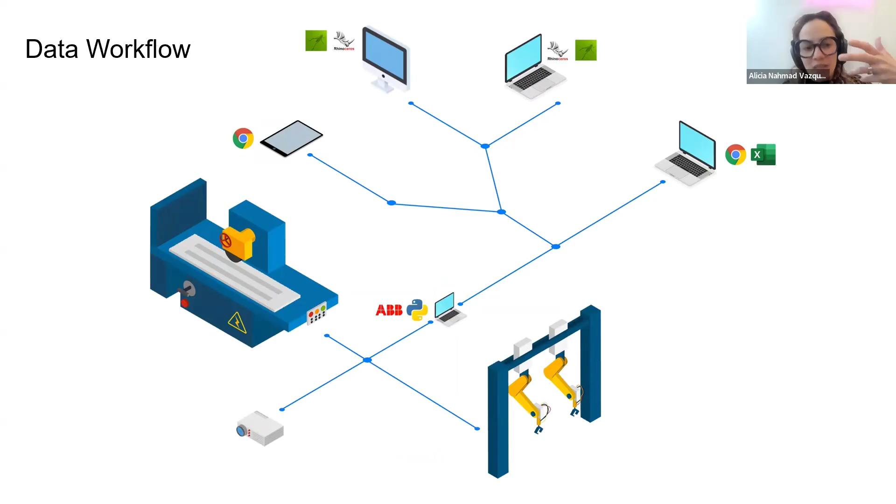Might have some deviations. And also really trying to engage fabrication, assembly, also the designers. The designers have a lot of access to the platform, and also the whole factory floor, logistics, cost, time, data analysis, and all of our machines. So we worked on integrating all of the machines in the same data workflow to have everything connected on the shop, so that people on the floor can continuously look at the screens, see what to do, what's going on, what the bill of materials is, what machine they need to use, what parts they need to process. I mean, it's thousands of different pieces, thousands of different parts.

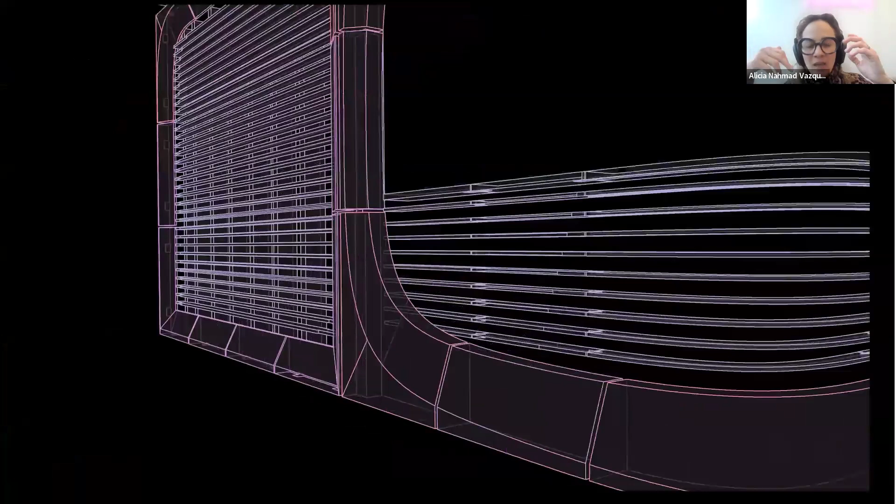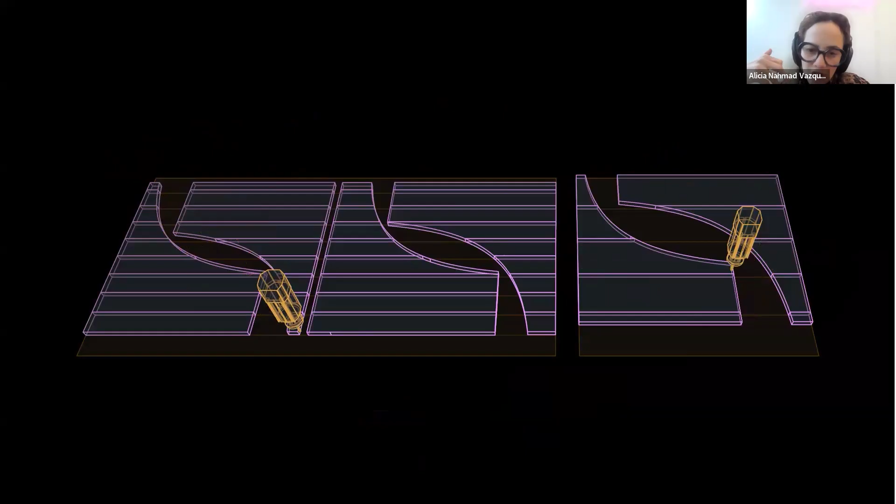So how can we better manage this complexity to be able to produce a project that requires this level of sophistication? So in this case, you can see from the mesh to the rationalization into those pieces that could be dealt with by the local machines, and the design that we were putting in, not only of how the machines are located, but what is the interaction between them, what is the production pipeline and the workflows between them, and then looking at the different lamination strategies that we could use, 2D, 3D, to be as efficient as possible with the material usage, but also with the machine usage, with our electricity and the glue. I mean, you have all the other different things that you have to consider.

So all of these pieces get 2D milled before being assembled, and then finally not 3D milled actually, but 5-axis milled with the robot to get all of those complex curvatures and complex shapes that were required. So this is a lot of the work that we do on our platform, that we have our own bespoke, developed platform to do all of these processes.

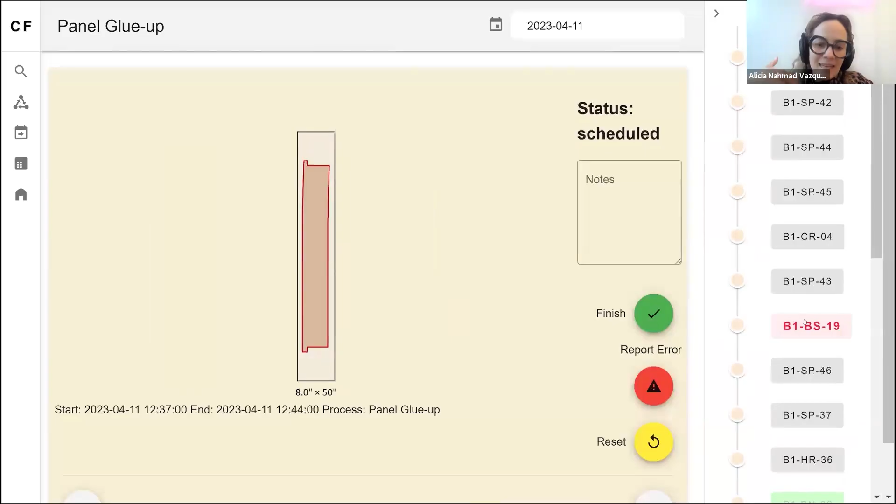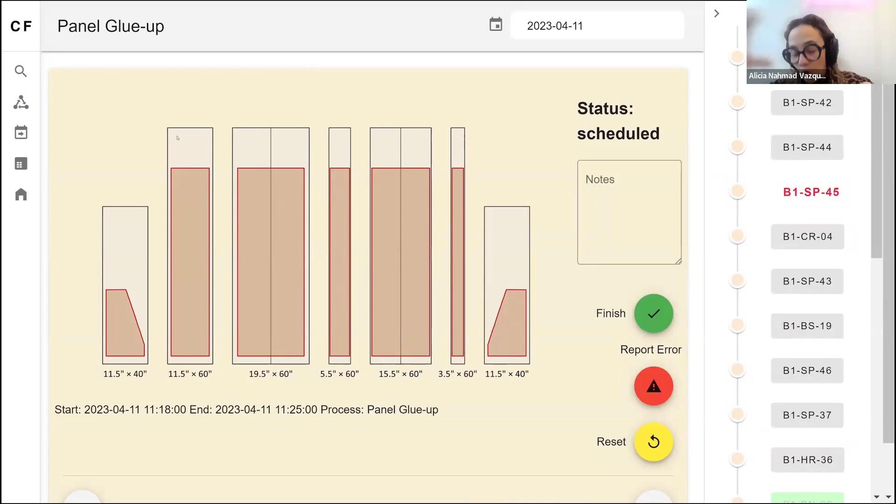Also, of course, you can see all of the different machines, right? Really try to look into what machine is there, what is programmed in a single given day, depending on the piece, what the people working on the floor have to bring to the machine, how many boards, which size, and also they need to be able to visualize what is going to go on those boards. So in this case, we're trying to integrate in our platform the whole process, from the designer mesh to the shop worker, right? So they can see what is going on, and they can also localize the different pieces.

Okay, they can see not only where it goes, but they can also understand how it is tagged, basically, how it is referenced, and also what kind of materials they need. So this is also communicated to the developer and communicated to the architect, right? So this piece, this is the identity, is located in this part of the building.

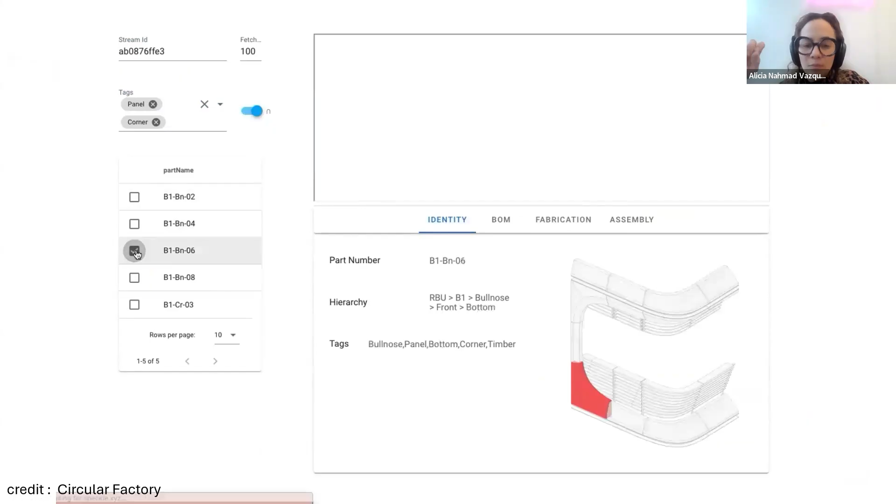It will need a certain amount of materials, including wood, adhesives, brackets, how many hours it will take, not only machine time, which we know is really easy to calculate because you just simulate it, but also human time, right? Humans moving stuff around, humans loading machines, all of that has to be calculated to have an accurate time of how you can make these.

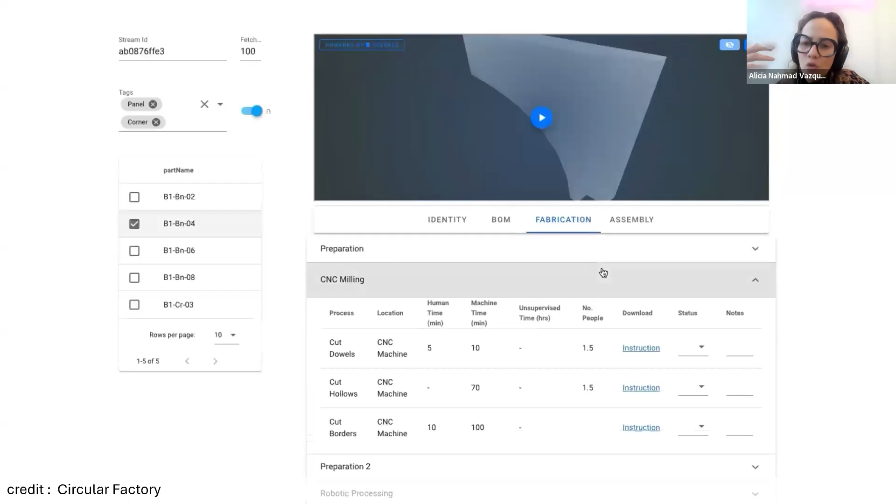And a lot of these human processes are not really quantified or digitized. So that's a lot of the work that we look into, and also a lot of the unsupervised time, which basically means that the piece is in storage, or the glue is drying, right? How many people you need, and for example, sanding, staining. So trying to quantify all of this as much as possible, so we can have a reality of what it means to build these projects, and we can communicate this to all of our partners, like the designers, the architects, the developers, and also the contractor who is actually building on the site.

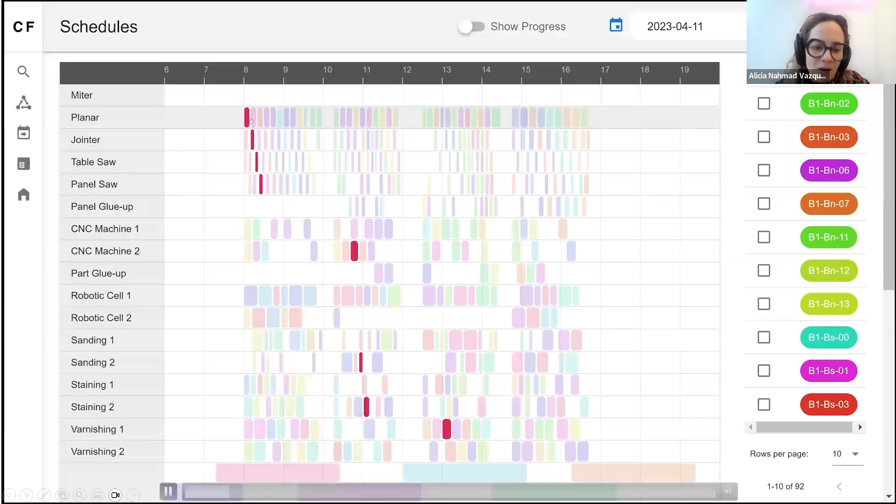And of course, scheduling things, right? How things get scheduled, get constantly rescheduled. If there is a mistake in a piece, well, then it has to be redone. But of course, it's not as easy as I have to redo it. There are a lot of processes before and after that have to be dealt with. So this is a lot. So in this case, a person can put where there is an error or it was actually finished, and then things have to be constantly, dynamically changed.

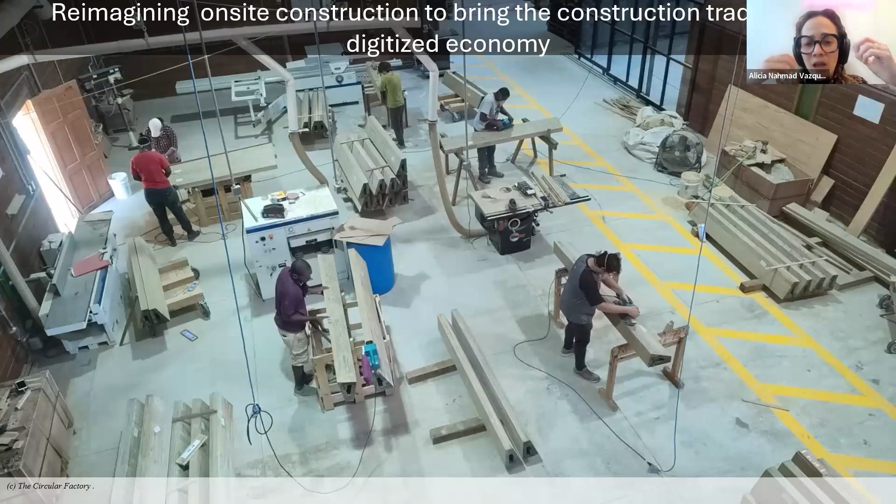So this is how our shop looks. The first Circular Factory 1 has the robot arms, two large robot arms on a track, and a bunch of other machines where everything is processed. And we have 20 people, all of them local, that have been trained for a couple of years now, and some of them started with minimal carpentry knowledge, and at least 5 of them are now using robotics, and some of them even programming robots and programming CNC machines in 3 years, right? So I think it's pretty amazing, the learning curve, and also how they are happy to actually be learning and doing new things.

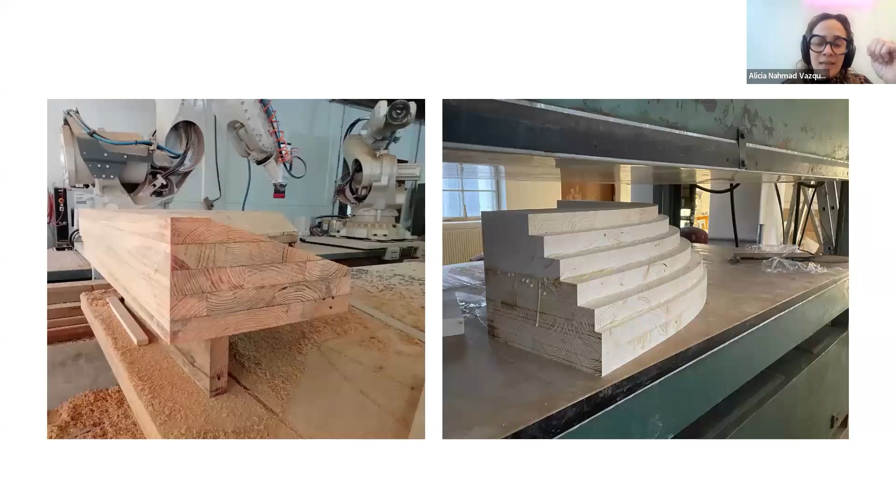And this is a prototype that we built of that Deja Vu project that we exhibited in 2023 at the Palazzo Mora in the Biennale, where we built all of this using our platform. We also look at patterning and different techniques. And on the more recent project, we have developed a kit of parts for prefabricated glamping cabins, all of them using timber joinery, traditional Japanese joinery.

So all of this means that all of them can be assembled, disassembled, with a really interesting kit of parts where you have not only timber frames, but also facade panels, facade louvers that have different gradients, so people can really pick what they want in terms of finishes, in terms of facades, in terms of the wall panels, but everything is done using joinery.

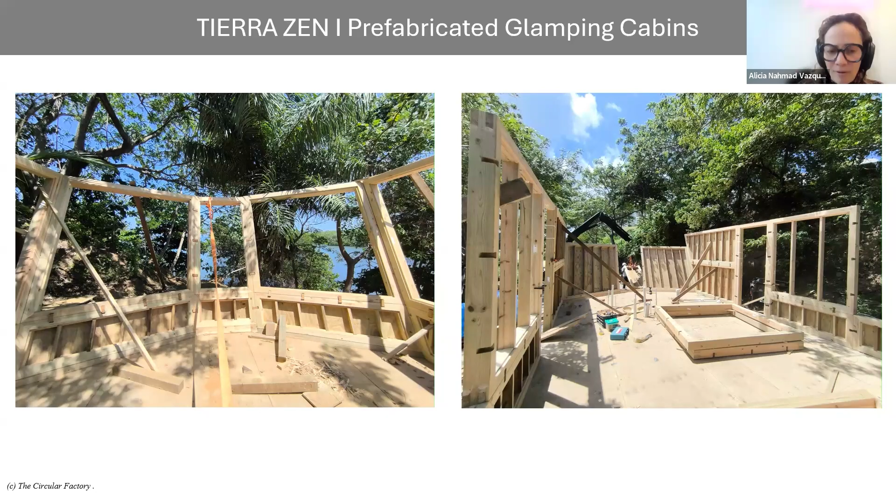So it could actually be disassembled and moved to a different place, different to a stick frame construction. So here you can see some of the panels that we have in our kit of parts, different panels. Everything gets very quickly assembled on site after being prefabricated. And yeah, these are some of the cabins that we have built.

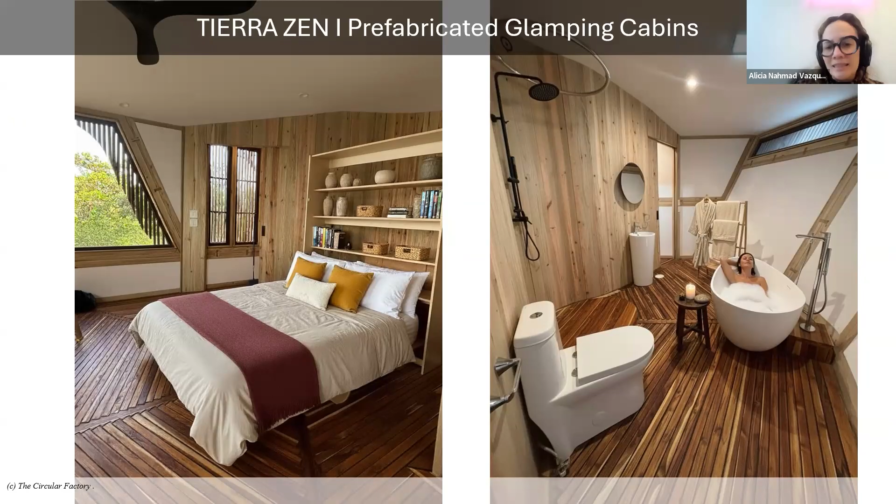Well, this is the same one that we have built on site, with all of these interiors, all of them really trying to be organic and trying to take advantage of the fact that we have digital tools to make something that looks and feels different, and that gets people excited. And when they get in, they really feel like this is a space that is different, but it's still using local machines, local materials, local workers, local crafts, and producing all of it near site.

So these are some of the interiors of the cabins, and yeah, that's our work and research. Thank you very much for this invitation, and I hope I'm on time.

Hello, hi. Very interesting presentation on projects, honestly, and very impressive. I have a question about the project where you used hot wire cutting and then used it as formwork for concrete. If I remember, you had really delicate lines, but the quality of the concrete was really amazing. I've been there pouring concrete, casting, and being able to handle those really delicate lines is a bit of a tricky job. So I was wondering, could you share your experience more on using formwork for concrete?

Yeah, so that's something we have been working on quite a lot, especially because a lot of our industry partners want the formwork, right? So we have tried a lot of different solutions to coat the foam, to enable them to get the creases that we want, but also to enable them to demold, right? So a lot of our conversations with our partners are about where they need the holes to demold, and we use a lot of different products to coat the foam, from truck liner to latex to really special paint. So that's a lot of iterations.